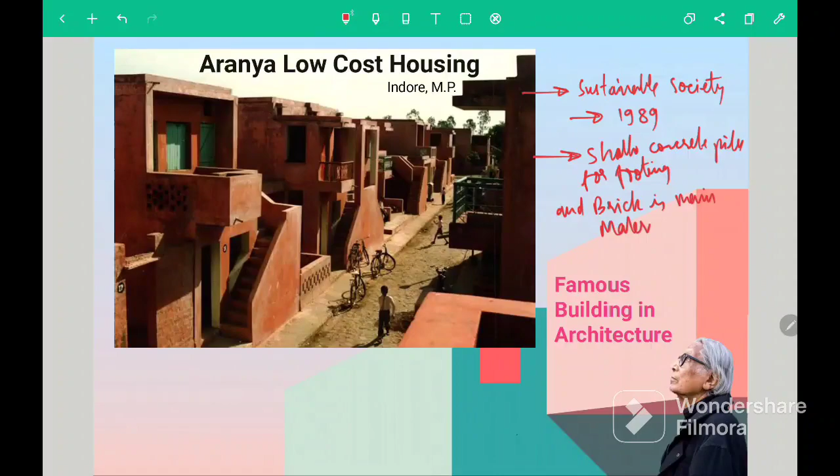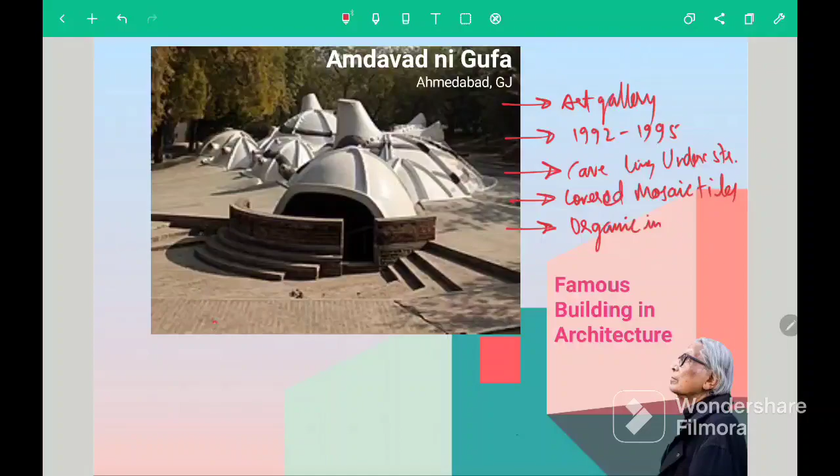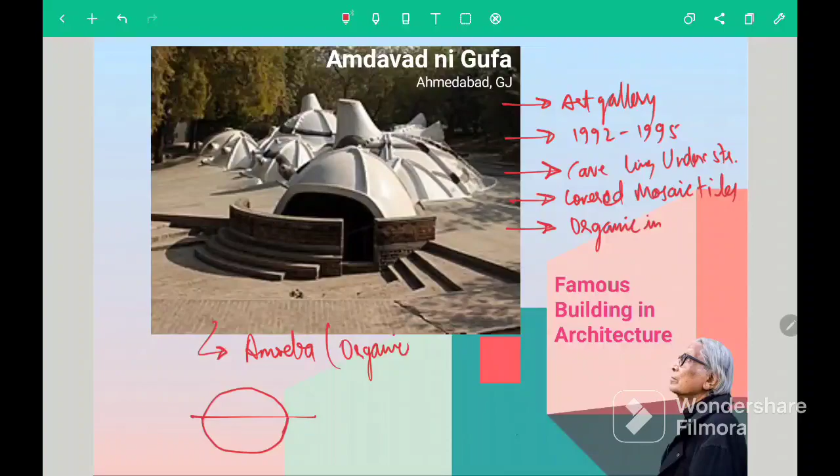Next is Amdavad ni Gufa, an art gallery built in 1992 and opened in 1995. In the design of this gufa, he used cave-like underground structures with a roof made of multiple interconnected domes, covered with mosaic tiles. The interior of this gufa is very organic in shape. This gallery represents a unique juxtaposition of architecture and art, and the design resembles an amoeba or organic form. The main concept of this gufa is to connect the upper part of earth to the underground part of earth.

Let's see his next work. Sangath office building is an office designed by Doshi for himself, completed in 1981. For the design, he used various sunken vaults in composition. The overall form exaggerates the details of nature with its rolling mounts, cave-like spaces, terraced land, and playful water channels, making it one of the finest combinations of nature and built form. Through this building, Doshi wanted to express his desire for a connection between nature and the individual.

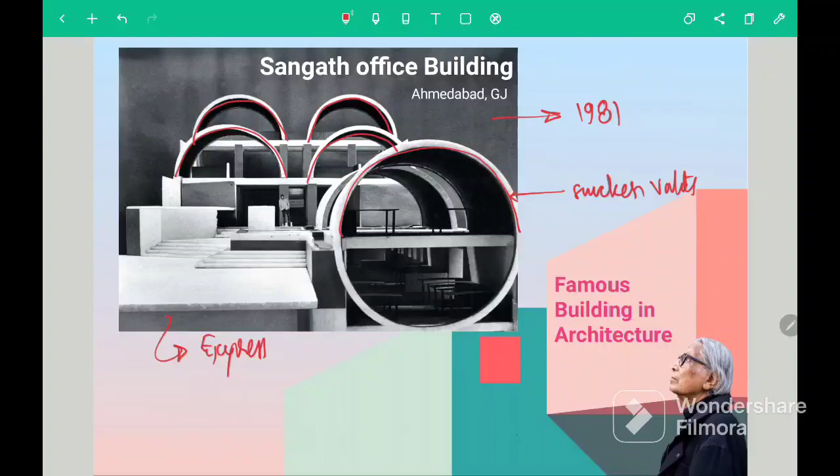The next building by Doshi is Jnana Pravaha Centre for Cultural Study, located in Varanasi and completed in 1999. Its main design element is exposed brick.

Next is Atira Housing, in Ahmedabad, constructed 1957 to 1960. In the design of this building, he was inspired by Le Corbusier. The main design element was segmental arches, which are elongated to create vault-like structures. He also used exposed brick in the facade.

Next building is LIC Housing, Ahmedabad, one of the finest housing units built by Doshi in 1973. In a single building, he accommodated 3 income groups across the 3 floors: top for LIG, middle for middle income group, and bottom for HIG. It also has reverse stacking, which provides the topmost unit with a room, kitchen and a lavish terrace, and the lowest unit with a veranda.

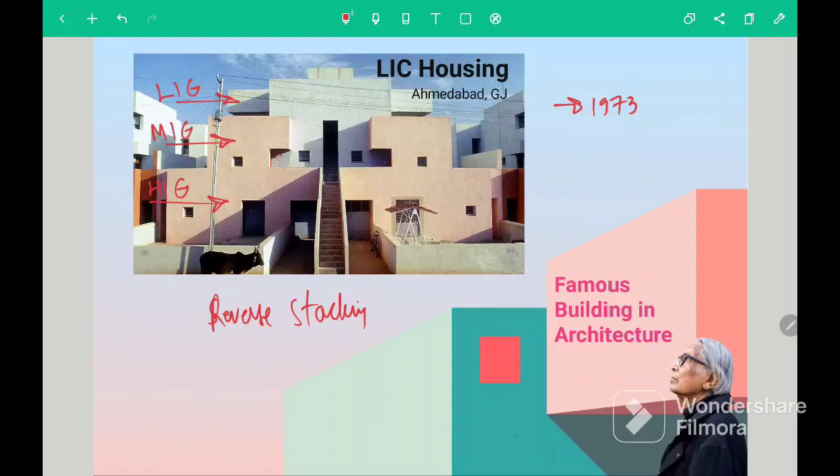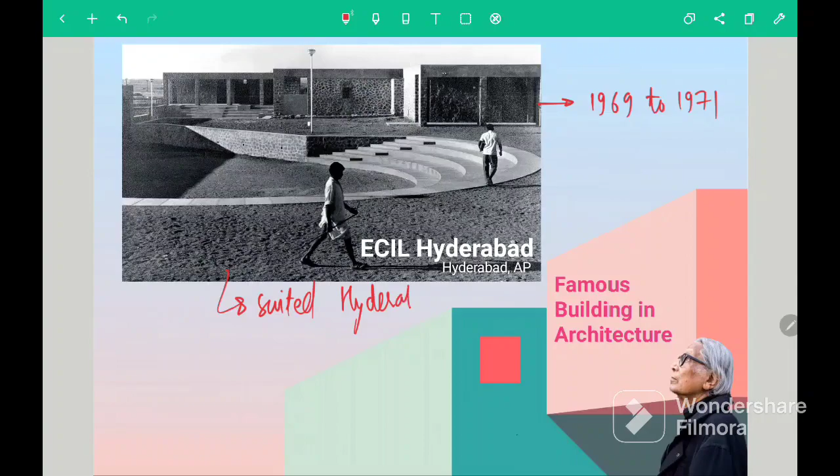Next is ECIL, Electronics Corporation of India, built 1969 to 1971. He designed the structure to suit the climate of Hyderabad, using charts to establish sun angles and wind directions.

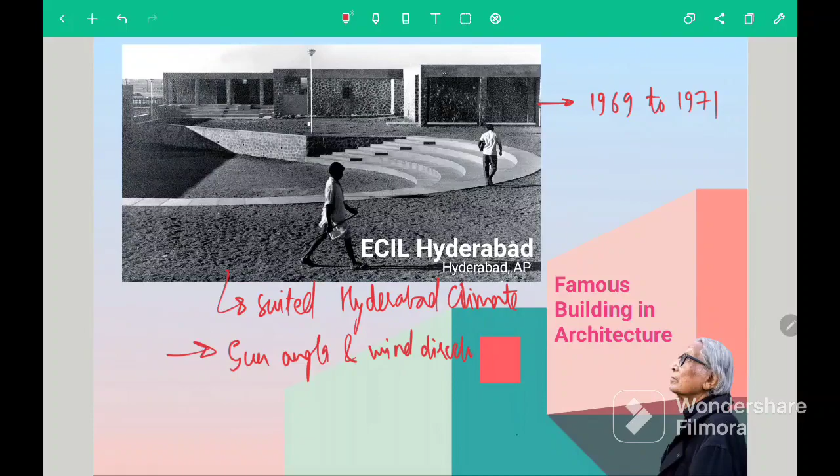Next is IIM Bangalore, a 100-acre campus built in 1983, based on the planning concept of Fatehpur Sikri. In the planning and design of IIM Bangalore, he reflects two of his inspirational architects: one is Louis I. Kahn, and the other is Le Corbusier.

Next building is Tagore Memorial Theatre, located in Ahmedabad, Gujarat, built in 1966 by Doshi. In the design, he used a perforated curtain-like entrance facade on the west, and used columns as a sculptural element.

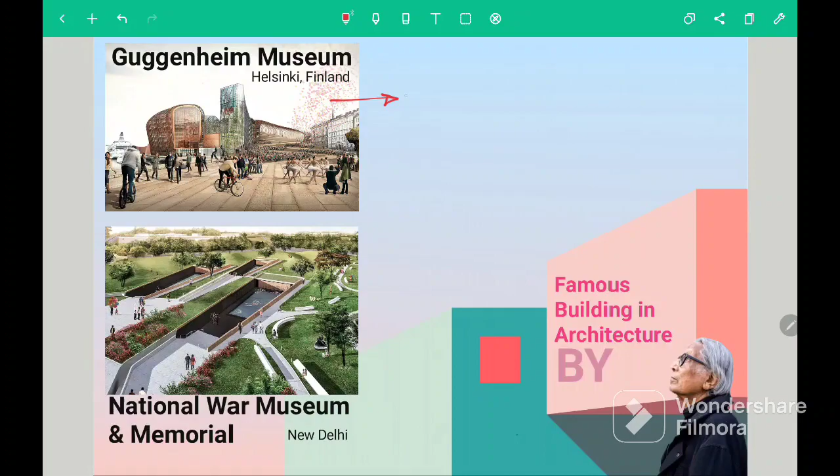So friends, these were some famous buildings by late architect B.V. Doshi. He also designed the Guggenheim Museum of Finland, but it was later abandoned by the government due to fund issues. In 2016, he designed the National War Museum and Memorial in Delhi, which is under construction.

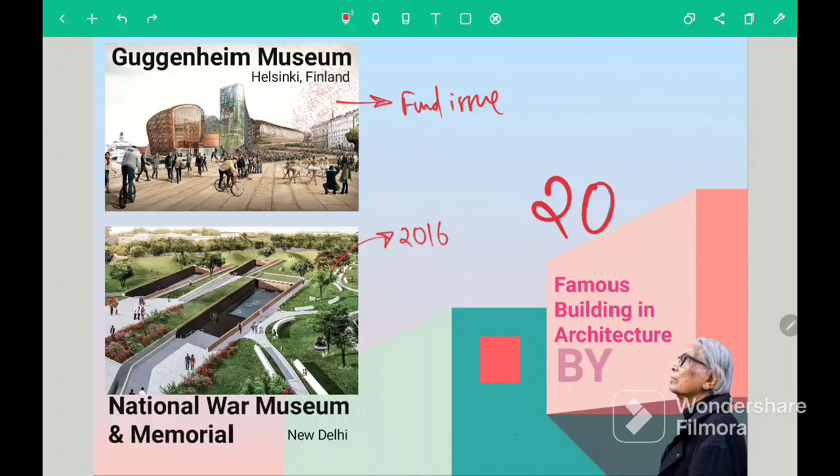For his commendable work in architecture, B.V. Doshi won the Pritzker Prize in 2018, becoming the first Indian architect to be honored with the Pritzker Prize.

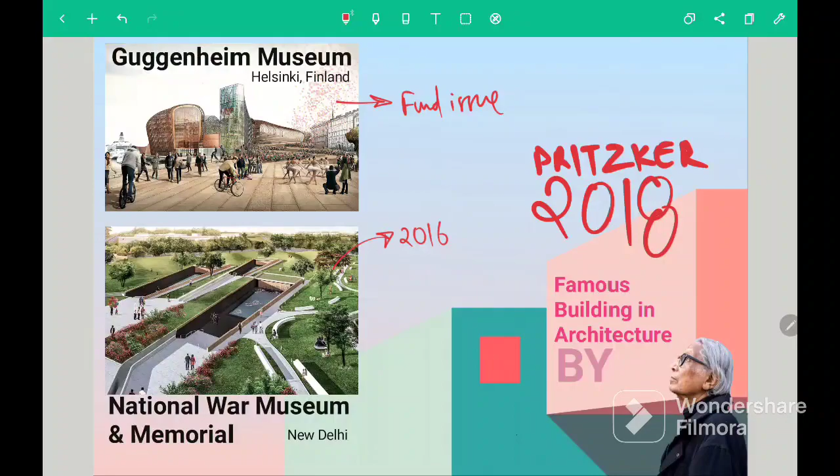We learn from those who came before us. So eventually, all over the country, in India, except these such monuments, nothing will be there, no trace. We will have only roads for cars, parking, hawkers, because that's how we eat our days, enjoy our celebrations, entertainment of a cheap type. And rooms which are shelters, which may be luxurious, but that's all, because we want to be alone now, isolated, enjoy yourself, and so we can talk about society. Socially relevant architecture, I don't think we have anymore. I don't mean to say that we cannot have a better house. But when you just step out of the house, get into the entrance, and go to the street, what kind of street is there? Can my children walk and go in 2 minutes to a park? Can they see something there and learn and come back? Can the family go there and say, oh, it's wonderful, I learned something more today, I enjoyed my time?